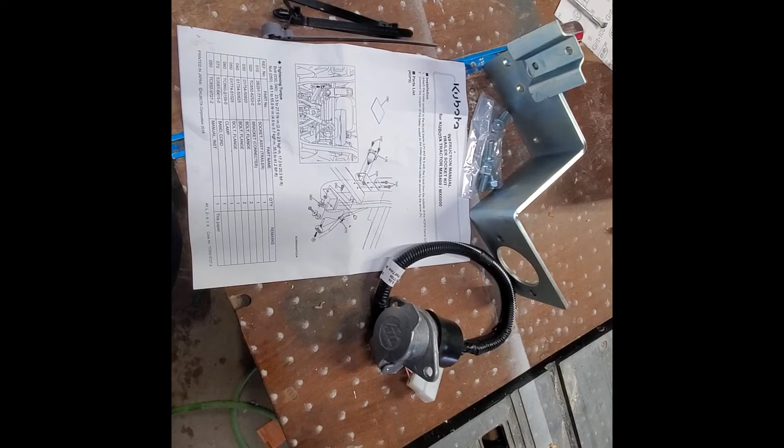Another little tractor project on the MX6000. This is the 6-pin trailer wire kit. It took a long time for this thing to come in, just like the old supply chain issue stuff lately. After I bought the tractor, it was a few months before it came in.

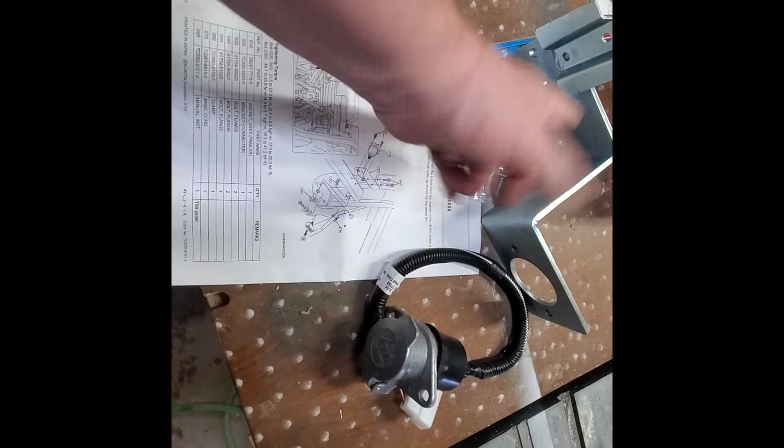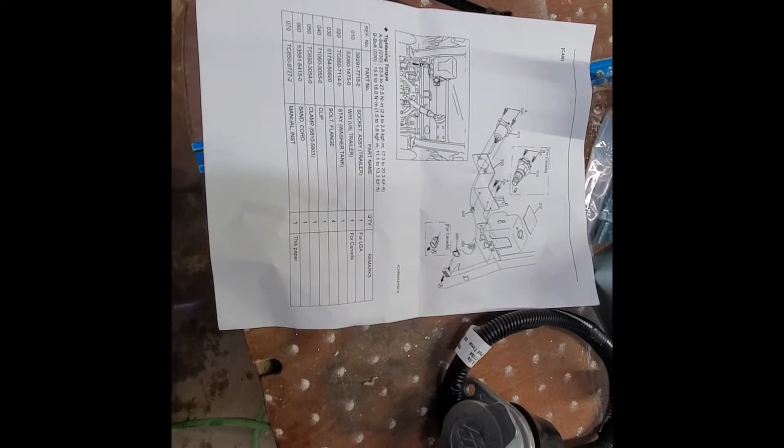So it came with the instructions, some wire tie wraps, the bracket, the 6-pin plug, and the bolts that come with it. I first looked and it's for the MX5400, MX6000. Started looking at the diagram real quick, and thought, oh man, that's for the non-cab version. But I turned it over, and there are instructions for when you have a cab. It looks like everything's in the kit. We'll get started with some quick steps and get this installed.

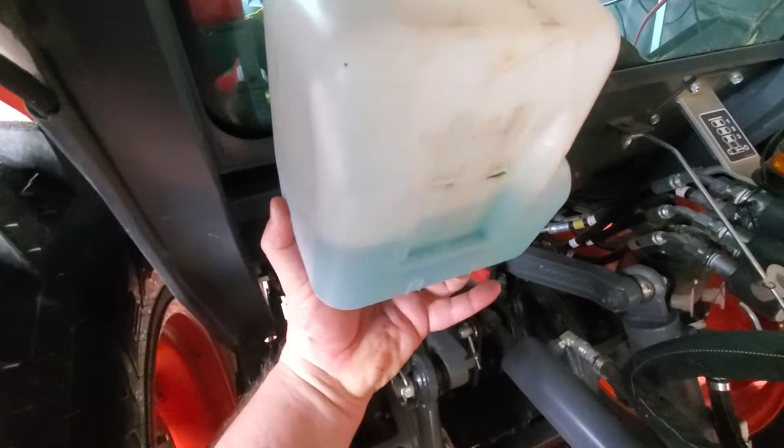Okay, first step, I've got to get this windshield wiper reservoir off, which is not hard. I've already loosened it a little bit more. There we go, so it's just on that bracket that slides on. Again, just set that out of the way.

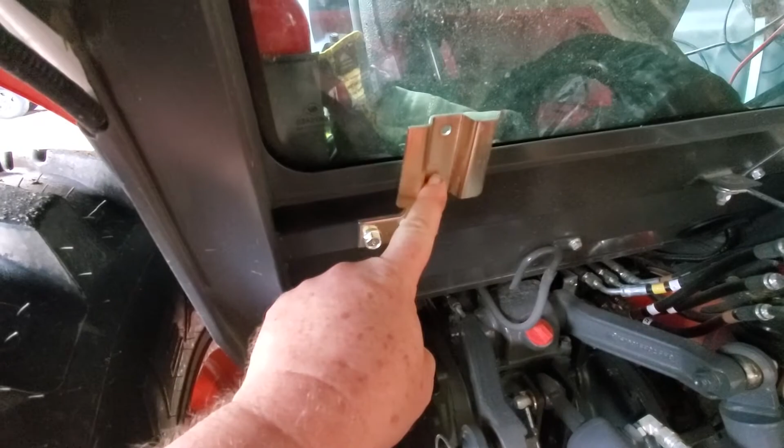Then we'll be taking this bracket off. All right, the new bracket's back on. These, by the way, are 12 millimeter, when you go to take the other ones off, so just get your 12 millimeter socket. And as I always say, be careful around glass, don't get crazy.

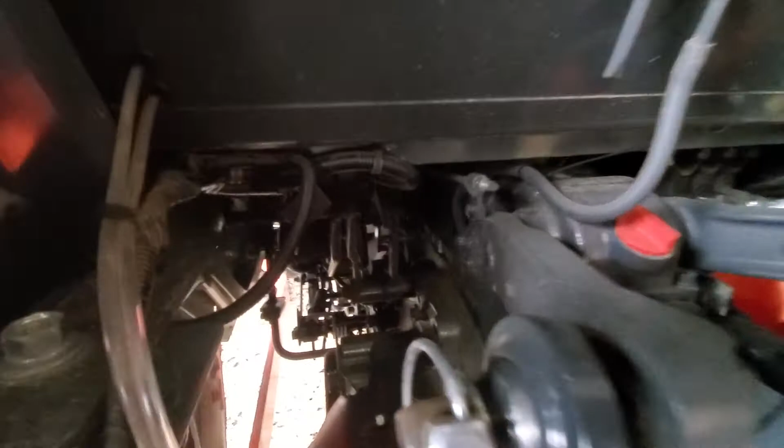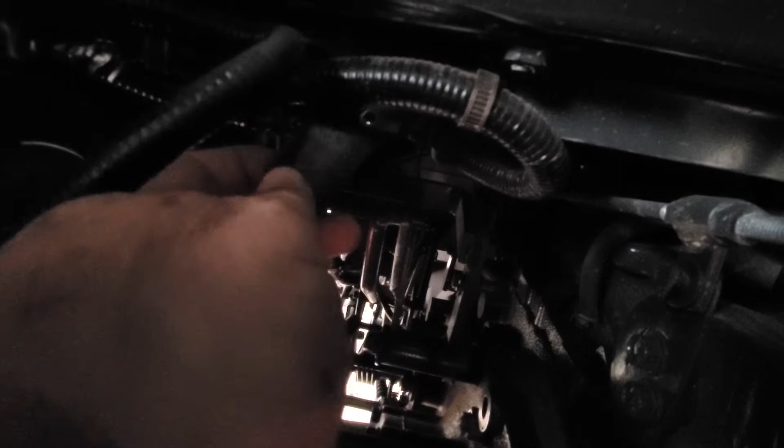Next, when I was looking for where the receptacle is to plug this thing into, it is down just below this level right here, and sadly can't really see it with the light real well, but there is no protection on it - it's just an open blade socket. So I'm glad I saw this because I'm probably going to clean that first before we plug it up, just to make sure I haven't already gotten some dirt up in that thing.

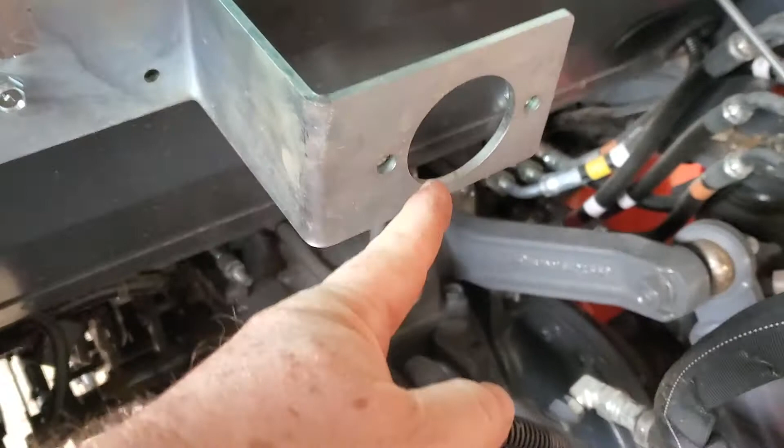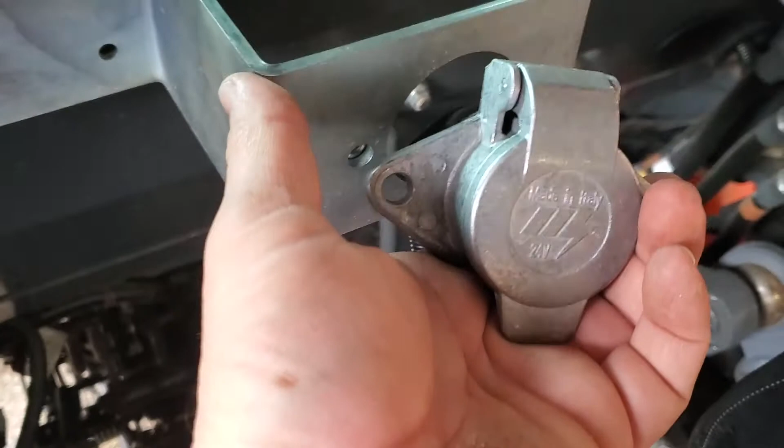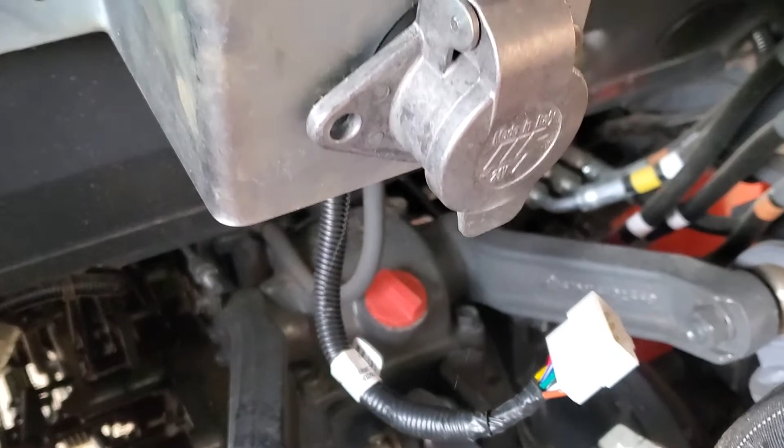All right, pretty easy at this point. Put the plug through the hole. I'm trying to one-hand this while holding it right now, but could not find a reasonable place. Obviously we want this lid swinging up for protection, so we're just putting it in that way. And it looks like it's got a little boot that kind of seals. So I'm going to go ahead and get the nuts and put that on, and we'll hook up the wiring on it.

Receptacle is bolted in place. The harness is connected now with the white connector. You can probably see it a little bit better where that was plugged into.

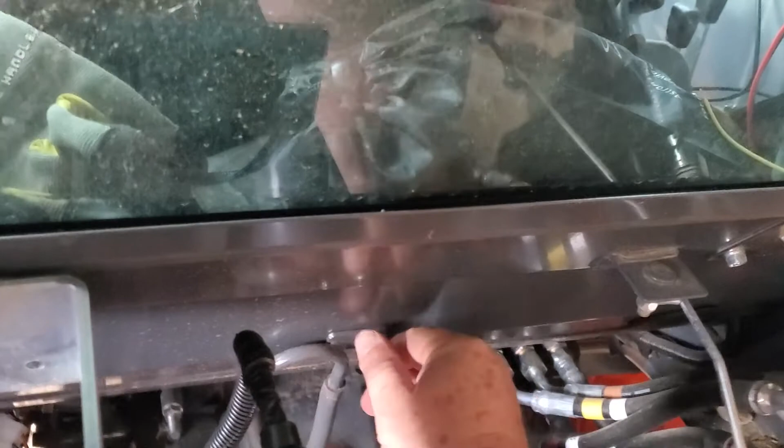Next step, we need to secure these wires. I do see some bounce in that I don't really like. I don't like anything that does that over time with the tractor with vibration, so I can already foresee probably, I don't know, maybe a third leg that may come down and bolt to here just to take out that wiggle on that side, but it's not too bad to fix.

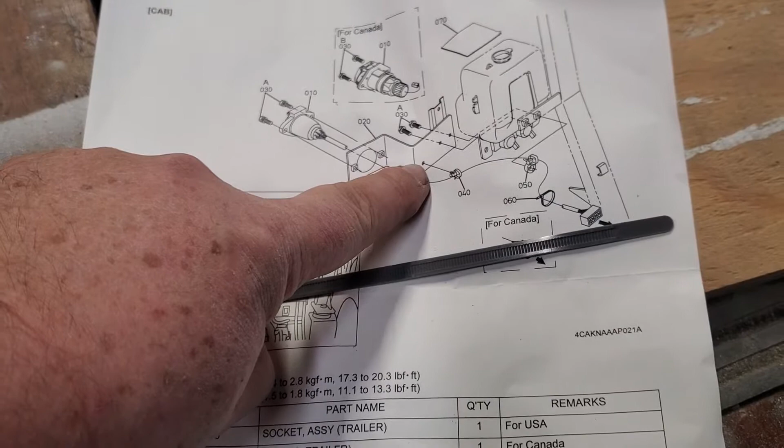Let me go get the wire ties on. All right, as I'm putting in the wire ties, something I noticed, it's pretty easy. This one has a barb, there's a hole right here that's going to go in and keep it real secure. That's good. Another just simple plain old wire tie, nothing fancy there with it.

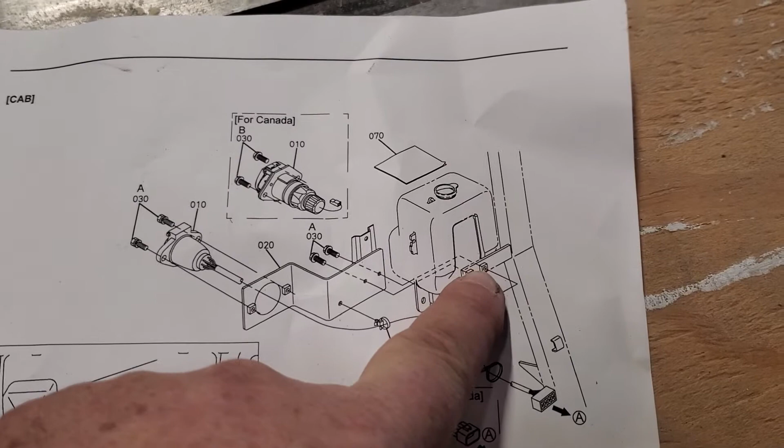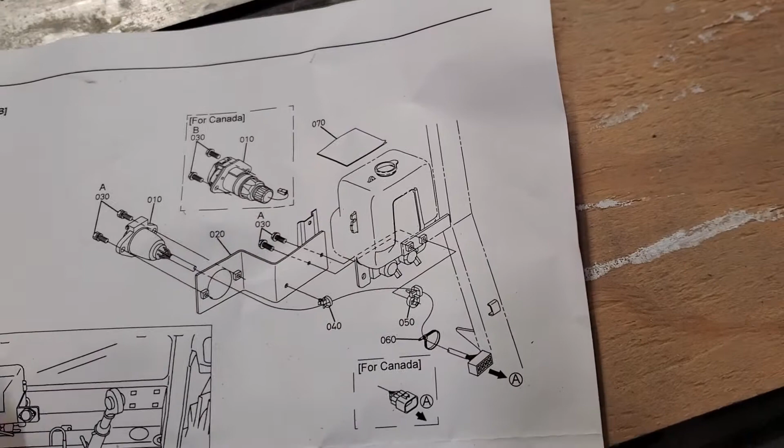And this one, what's the deal with that? You see some barbs inside of that, and if you look closely at the back side of the mount, I'm going to guess that where the threads are coming through from the bolt we mounted it to went in through that hole. There should be enough thread there that this gets pushed on from this side, and those are like little cam locks - slides on, keeps on the teeth, and then you've got the regular wire tie. So I'm going to go test that out and get them on.

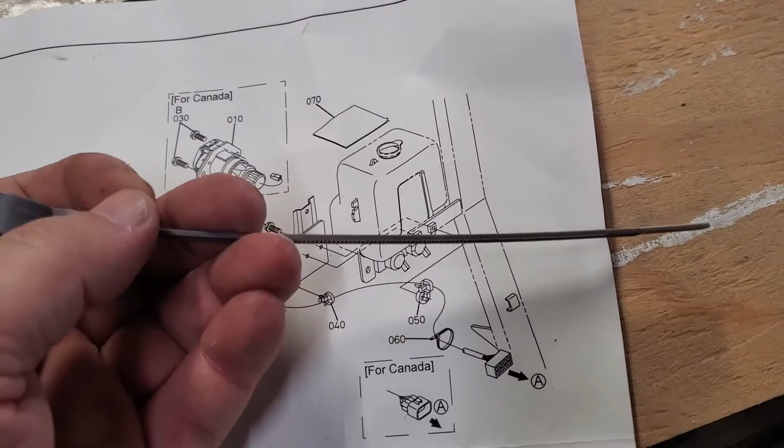Okay, it always seems simple until it's not. This one went on easy, plugged in from the back. This is still loose so that I can move around - we'll tighten up things at the end.

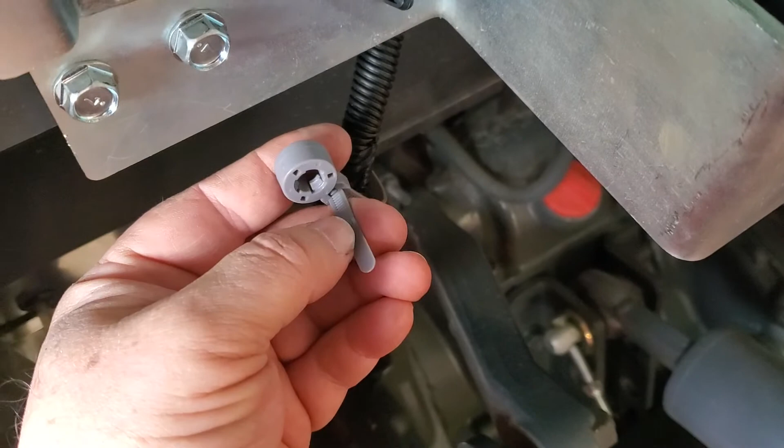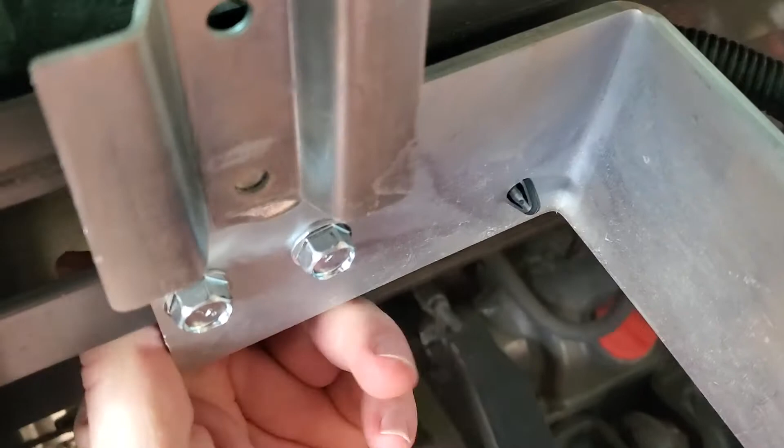This one was being a little bit of a pain. It does go on the back of the threads of this bolt, but you better go ahead and put it on beforehand. If you can see which way it goes through, you should see the barbs on this end, so we should be able to reach up and just push it on the back. Again, I'm not going to tighten that up yet until I get everything on.

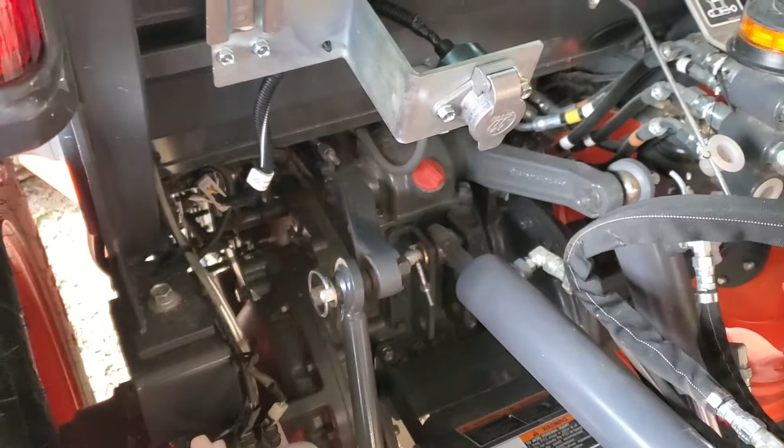But another thing that I have noticed, I hope that this will focus when I get in there. All right, if you can see decent enough, you can see that the very back of that harness is exposed. You can see the connectors in there in the back of that, and it's pointing up, and it's on the back of a tractor. So, man, I don't like that.

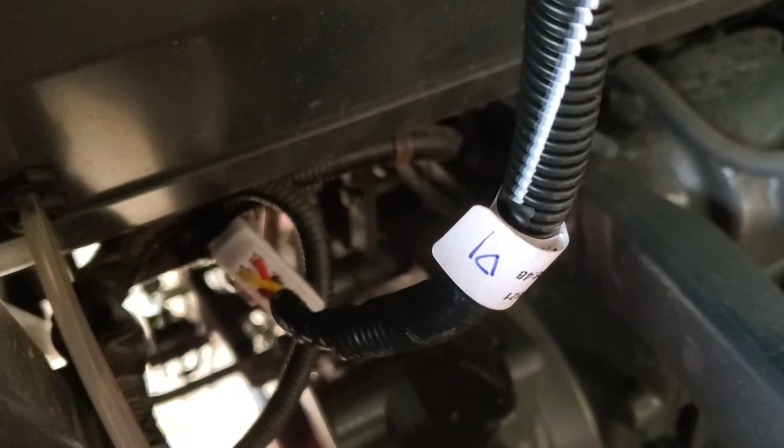I just don't like that for electrical connections, the way that's put there. So that's either going to be a combination of silicone, let it set up, and then wrap it, something to protect from grit and salt, whatever on the roadway - that's going to get up in that connection there. Just, yeah, I don't really like that setup. It should have been a sealed connection on the back of that harness, but that's okay.

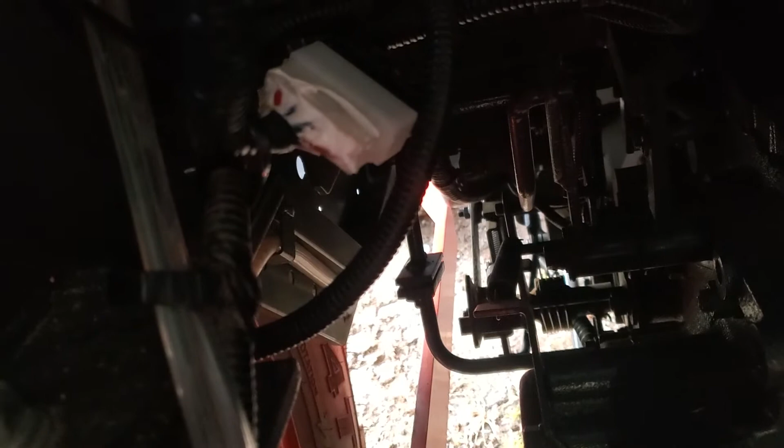We'll adapt and overcome. Wire ties secure, 1, 2, and 3. And I went ahead and put some silicone up in that crevice there of that harness connection. Well, it still won't focus. Come on. But at least that's going to keep the junk out of getting into that harness there.

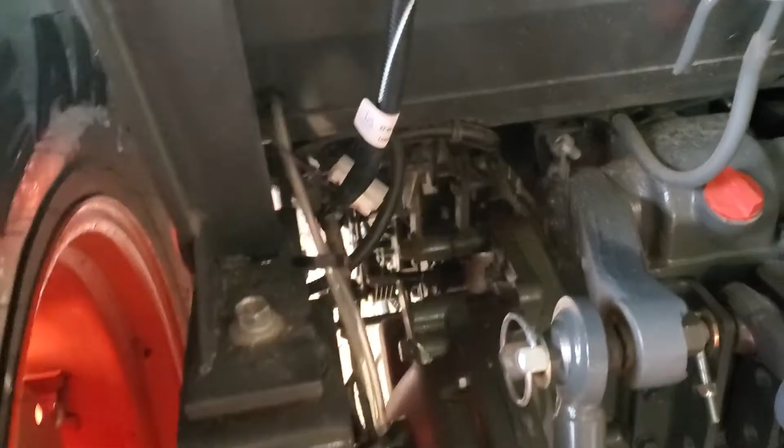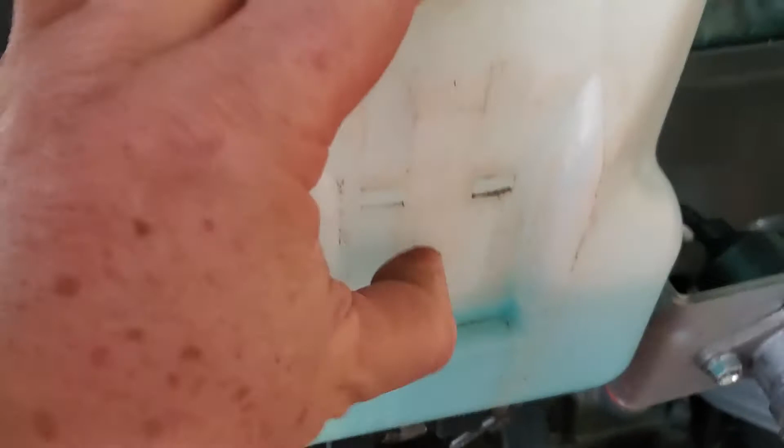So getting ready to put the reservoir tank back on. In fact, I'll just go ahead and grab it - it was just left here plugged. So let me get a handle on this thing, stretch it up, and back on the new thing. And it's done. She's got signals now.